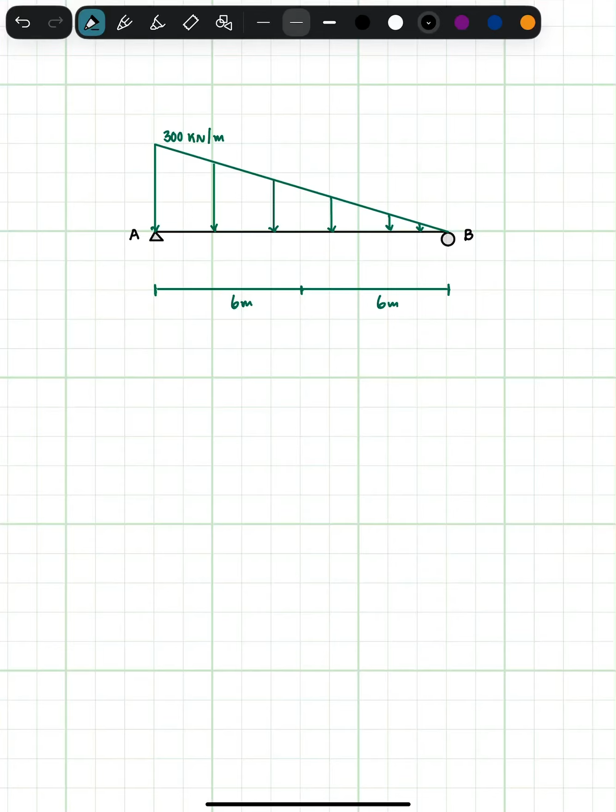Let's solve this. So, if this is new to you guys, last video it was a uniform load. Now, this is called a triangular load. The main difference is the shape. The uniform load is a rectangle, and this is quite obviously a triangle.

Now, what this ultimately means is that the magnitude of this force is the area, right? So let's do the area to get the magnitude. 1/2 the base. So it's a triangle. Let's draw a mini one here. The base is 12 and the loading is 300, right? So let's get the area of this.

So the area is going to equal the magnitude of the force, and that equals 1/2 base 12 times the height 300. So we're getting a magnitude force concentrated point load of 1800 kilonewtons. So let's move this to the side, and let's see where on a uniform beam, we know that in the rectangle, the centroid is, let me draw this correctly. Just gonna draw a straight line here. So it's 1800 kilonewtons, right?

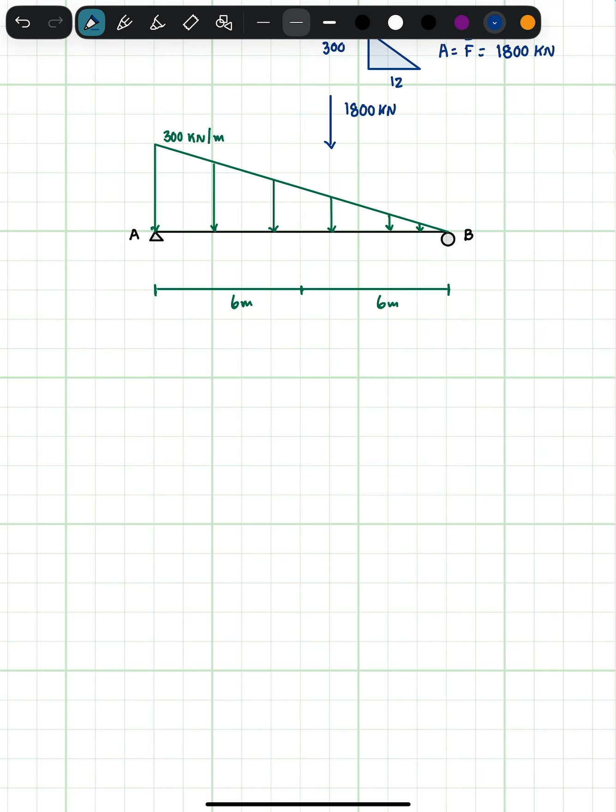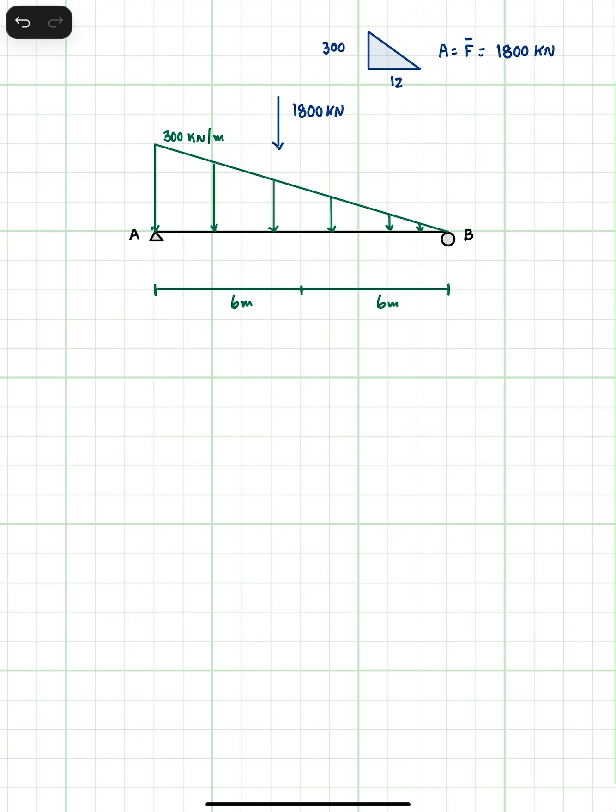But where is it going to go? Right? So with the triangle, it happens in the centroid. Every force magnitude of any shape is going to happen in the centroid. But where is the centroid on a triangle? Well, it depends, right? Because on this triangle the highest magnitude is happening here at A and ending at B. So the centroid, and there's a formula for this.

So with this, the centroid of this triangular load would be 1/3 of the base. So if this was 1/3, it'd be right here. So let's apply this, right? Let's erase this, apply this. So what's 1/3 of this entire length? Let's say 1/3 times 12. 12 meters because it's 6 and 6. So it's happening at the 4 mark, 4 meters away from the origin.

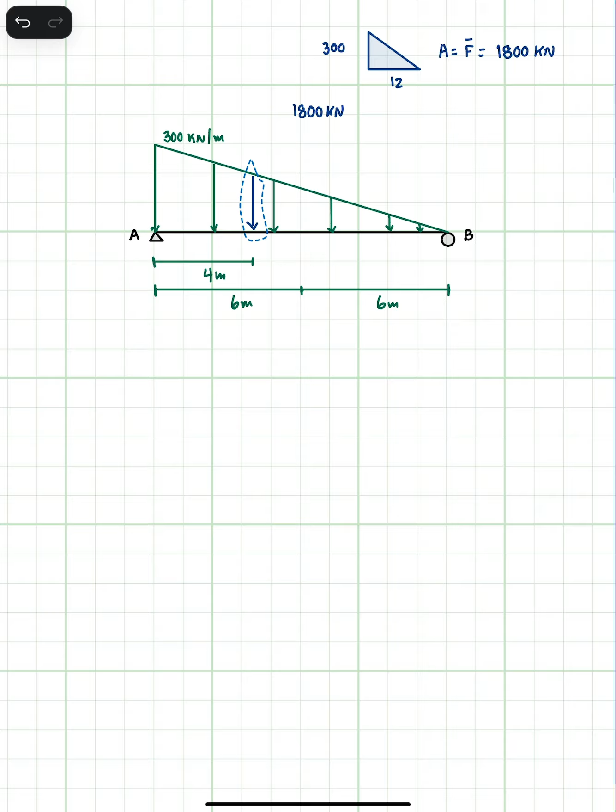So let's draw 4. So if half of this would be 3, I'd say it's happening right here at 4 meters. So now I know that the magnitude of this force is here at 4 meters. Let's make that a little longer if it's possible. Let's just extend it upward. So this is 1800 kilonewtons. Okay, now we have the magnitude. Let's solve for the reactions AY and BY.

Let's sum the forces. Actually, I'm going to do this lower here. Let's sum the moments about A. Positive. It's going to be negative 1800 because it's trying to tilt the beam in this direction, right? So 1800 times 4 meters the distance. How far away is BY? It's 12 meters away. And sum of the moments should equal 0.

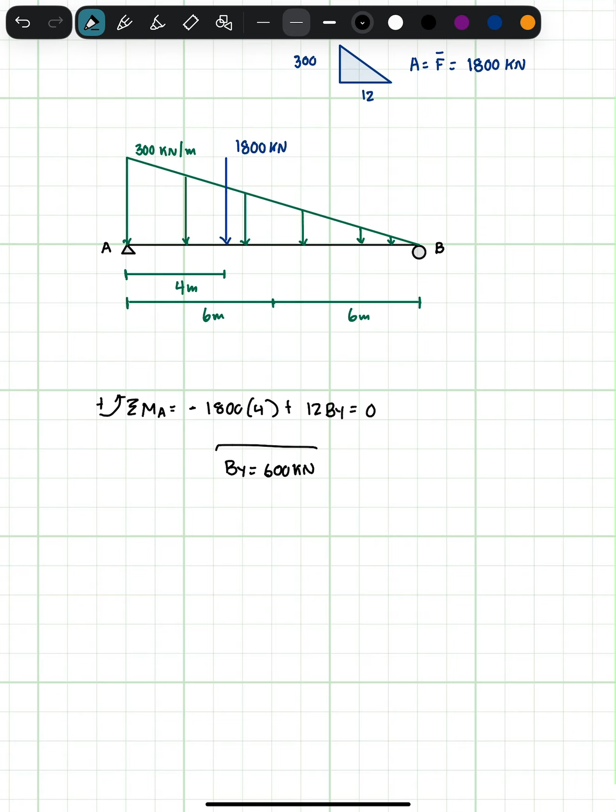Let's do the math. 1800 times 4. Let's quickly do the reaction divided by 12. So BY should equal 600 kilonewtons, right? Let's place that here. BY equals 600 kilonewtons of force. Now, that's 600 kilonewtons. So let's see what we get for the vertical reaction of A. Let's sum the forces in the y direction.

Okay, we got negative 1800 coming downward. Now we have 600 pointing upward. And I'm going to assume that AY is pointing upward as well. Just makes sense, right? Let's say plus AY. We need to figure that out. That's our unknown. Let's do this math. It's negative 1800 plus 600. I'm getting negative 1200. If we were to put this on the other side, we get AY equals 1200 kilonewtons.

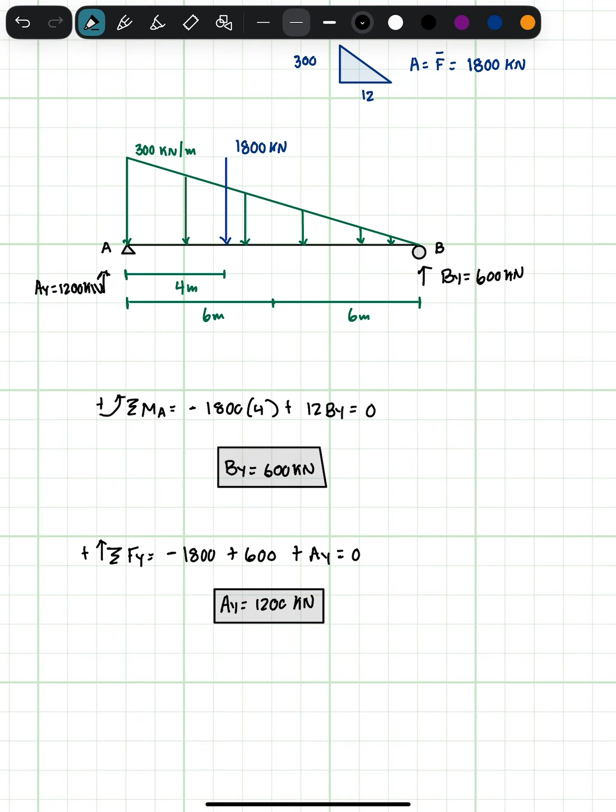Does that make sense? Well, we can check, right? 1200, does the force cancel out? 1200 plus 600 does in fact equal 1800. So we can confirm that this beam is under equilibrium. And this is how you solve a triangular load.